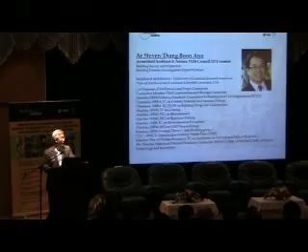We also have Steven. Steven, like to stand. I'm introducing you to this because I know there could be a lot of questions and answers. So these are the people - I don't want to answer all the questions, so please feel free to bring up your questions later on.

Architect Al, who's based in Penang, would like to just stand up and show you. And we have our engineer, Casey, would like to stand. Casey. And we have engineer Kok Yi-Hing, which is our electrical engineer, and engineer Kok Yen Kwan as well.

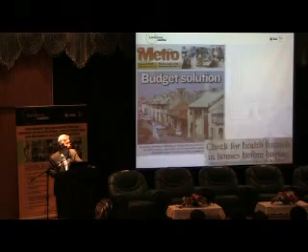Okay, now I'm just going to run through some of the stuff that we are all very concerned about - our properties. Because ownership of your property is probably the biggest and single most expensive thing that you ever buy in your lives or own.

So asset protection and asset ownership is something very important to our community. So how do you protect it? Most of us spend more money on our cars and our bodies, but very little money and effort maintaining our buildings. This is something that I believe generational changes and mindsets are beginning to come in.

So we begin to try and reach out as much as possible to how home inspections and property inspections can be made available to you all.

Now, I'm sure most of you, as what the Dato' YDP has mentioned, we sent out 349 letters, something in this order - this is probably the reminder letter. Okay, now, so building owners, not only you in MPPP have received this letter.

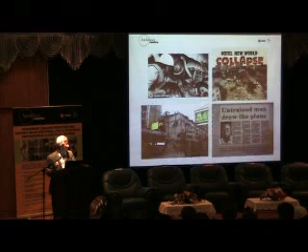So that's why the building collapsed. But that's very sensational. The bottom left is in Hong Kong, and you know, recently you heard of a building collapse in Hong Kong as well.

Now in Hong Kong they have other issues which I believe you are also not immune to, which is falling windows, especially in freak winds or even strong wind conditions. Older buildings or even newer buildings are suffering. They call it two types of aspects. One is mechanical falling out, meaning the screws and all that rust and then they fall out.

And falling windows are not fun. If your car is below or somebody is below, it's really not fun to be standing anywhere near a falling window or a falling breaking glass.

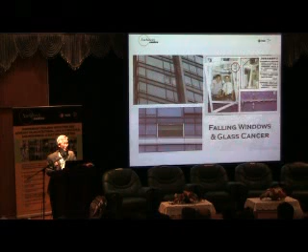The other one is, of course, excuse me, you guys look a bit serious. Can you guys maybe smile a little bit? I know this is a serious topic. It's hard to be up here with so many serious faces.

Okay, thank you. Now, this glass cancer. What is glass cancer? Glass cancer is happening a lot worldwide, where glass for curtain wall buildings like you see here just suddenly breaks. It's due to the impurity in the glass.

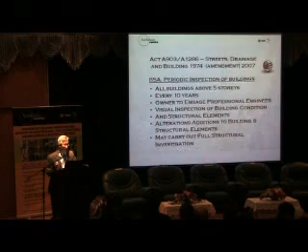So these are the kind of issues that has led Hong Kong to even do mandatory window inspections. But over here, back in Penang and Malaysia, we are basing our inspections currently on Act 95A. Now let me tell you what this Act says.

I won't go through the first two because I think it's been said. But the important one is line number 4, which is visual inspection of building condition. It seems like a simple word, but it's a big word because building condition means the entire health of the building, and structural elements.

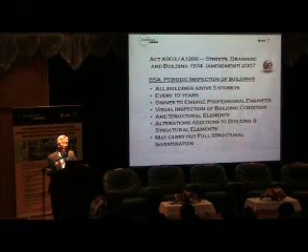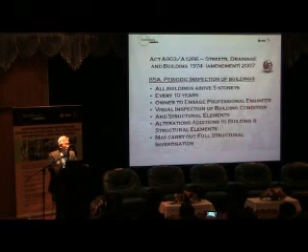Now, structural elements means - like if you are in your body, if you are above 50 years old and you go to a doctor and you choose to go to an orthopedic surgeon because you say, look, I need a checkup, doctor, I think I need to check my health, and you go and check yourself into an orthopedic specialist. Do you think that's a good idea? That's not a good idea, because he can't even look at your bones without an x-ray.

So there's a lot more issues with the health of a building. Pretty much like a human, you got your heart, you got your blood, and you got your brain. There's a lot of things in there that can go wrong with aging. So similar to buildings, do not look into the wrong aspect. You have to look at the holistic situation.

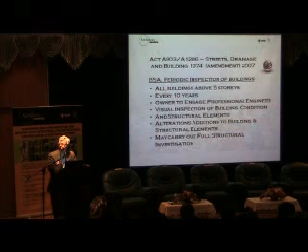Also, the Act requires - over time, we expect buildings to have been altered or added with parts. You can include signages, include extensions. A lot of people like to cover up their balconies with windows and glass. I see some people looking away. Now, some of these alterations of window and glass have got a history of falling out, and a lot of them are illegal. As a result, most of this needs to be inspected as well.

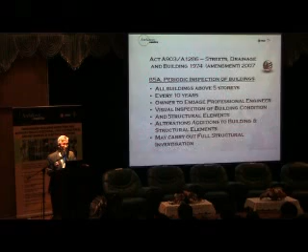Now, the repercussions of it, I have to leave to the policymakers here upon the completion of some of these reports. Now, on finding out issues that happen on the first inspection, the Act also allows for full structural investigations, which is part 2. We're not looking into part 2 in this seminar. We're looking really into part 1 of this inspection, the first visual inspection.

Now, in Hong Kong, the basis of how they have arrived at the mandatory inspections, they've come up with a code of practice. You can look this up, you can Google this - just Google for the building inspections of Hong Kong, where they have a long-standing problem of building neglect and to ensure safety in the long run.

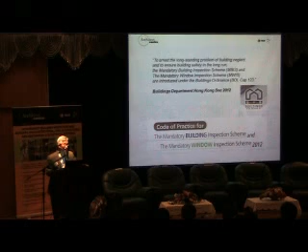Now this is as late as December 2012. This is not something that they have done years ago - they tried to do it years ago, but similarly, they ran into implementation problems. This is Hong Kong, and today, December 2012, only several months ago, they have launched this officially. So you guys are just there, getting things in the framework so that things can be done properly.

In Singapore, this is from the BCA Singapore, equivalent to our CIDB in Malaysia. They have an inspection scheme called SAFE, Structure Safe Building, which is under the periodic structural inspection. Here, they also have very comprehensive ways in which you are tasked and given notice to do the safety inspections in your property.

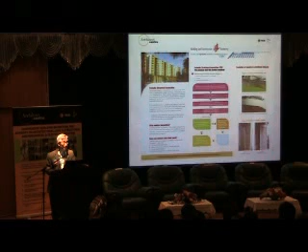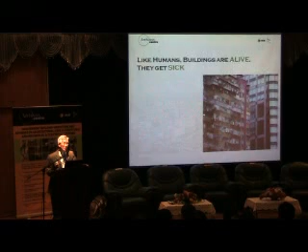Like I said, buildings, like humans, they are alive and they get sick. One of the biggest attributes to this is lack of proper maintenance, usually due to ignorance, funding or apathy, building neglect, wear and tear, and mostly to do with end of life cycle.

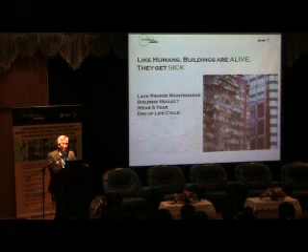What is end of life cycle? Everybody knows every 50,000 kilometers you change the tires in your car, right? Every 10,000 kilometers you change the oil. We all know that. But buildings wear out too, and things are not meant to last forever. So there are some parts of the building that reach the end of life cycle, like pumps, for example. Pumps are not meant to run for years and years. You need to change them.

And if some of these pumps are not changed, in the event there's a fire, when you try to put on your fire pumps, you find that the pumps are not working. So you end up having a fire trap, and buildings getting burned before the bomba comes.

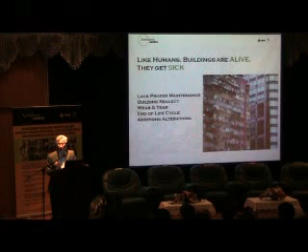Of course, additions and alterations. You can see from these photographs that many of these balconies have been covered up, and they all have potential. In Singapore, those things sticking out from the windows are called killer litter, and it's a jailable offense if something's dropped down and you hit somebody.

Abuse and misuse. Okay, so now, let me take you a step further about buildings, how the buildings that you live in, and you work in, and you play in.

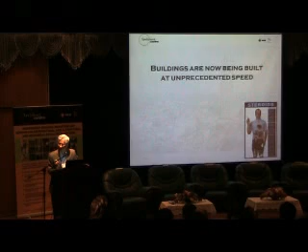Today, I see properties being built at unprecedented speeds, faster than any time that I have known. I've done a lot of buildings, my hair, you can see from my hair.

Now today, developers make money because they want to work fast. And every contractor that tenders a job, if they were to tender anything more than 18 months or 24 months, they don't get the job. But really, it's true. So buildings are now built like steroids. And if you build your buildings on steroids, what happens? They are born sick. They are.

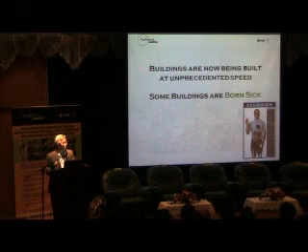Because it still takes 9 months to make a baby. Ask Prince Andrew about that. If the baby comes out two months early, if the baby comes out too early, it's a premature baby. You've got problems. You've got to nurse that baby back to health.

So today we see a lot of new buildings that come to Architect Centre that are born sick, that never got it right in the first place. And you inherit these problems, and the problems compound and compound. And 10 years later you go, oh, you mean we didn't have a pump all this while? This is what we are seeing in buildings, not only in Penang, but in KL as well.

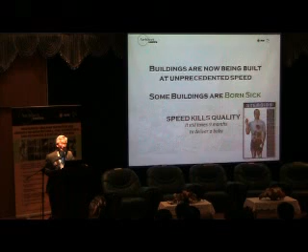So speed kills quality. So we have to be very mindful of that. Maybe from now on we have to allow shorter working hours. We have to only work in the mornings, and then afternoon, no working hours. And definitely no extra time.

Now the other aspect, and I think you all know, everybody's been to a doctor, is you get a doctor telling you you've got cancer, you're going to die. He says rubbish, incorrect diagnosis. Or maybe you got cancer, he says you got no cancer.

Now it takes a very skilled professional to see the difference between a crack that is cosmetic or serious. When you look at the crack, every crack to a layperson is serious, right, when you see a crack in a building, especially around the car parks and the building structure. But from our experience, 90% of cracks are not serious.

But what happens if your building has the 10% of cracks that are serious? Or the cracks that are not serious are diagnosed as serious and you spend thousands of dollars to repair and you waste your money. So this is the dilemma you face: is it a minor or costly defect, or is it safe? Look at some of these photographs here.

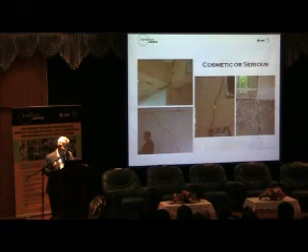This photograph was a school that was built in KL that has been abandoned. It's been totally declared unsafe.

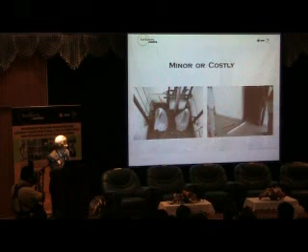A minor or costly defect. Look at the picture on the right here. It seems so trivial. That's the lift door, and that's just to check the level. Now what happens here? Very common - the tiler installs the tile sloping inside the lift, and water goes inside the lift. It's such a small problem, but you know how costly this is?

And if this was a bomba lift or a fire lift, you're in trouble. You got a death trap just because somebody messed up the tiling. You could be walking on this lift lobby all your life, stayed in this building for 10 years, and you didn't know that this small problem can be such a costly problem.

And here we see a lot of this. The doors of apartments, which are meant to be 1-hour fire doors, with hinges that are popping out. And this is a new building, a brand new building. And you got the fire door latch, the catch there, is stuck. Now what happens? The fire door is meant to be kept closed all the time in the building, so in the event you got a fire, it blocks the fire from moving into another space.

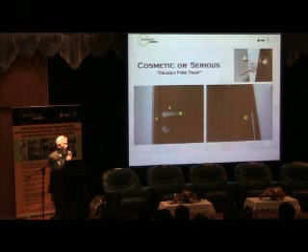So most of the time you find fire doors in the fire staircase. Now if your fire staircase has got one of these doors that don't close because of this little thing, in the event there's a fire, say on level 4, and you live on level 10, and you come down the staircase in an emergency, you get trapped because the fire will go into the level 4 through this door, and you get trapped there. So this little small thing has got amazing consequences.

A small picture like this - we are really scared when we see pictures like this, because the biggest source of fire in buildings is from the electrical riser. The riser, for those who live in apartments, is the doors that you find near the lift lobby where you've got all the electrical meters and the main power going up. And these doors are meant to be 2-hour fire rated doors.

Now we see so many properties that don't even comply to the bomba guidelines of putting in door closers. So you see this door, it cannot be closed. And this door here, it cannot be closed - it can't close by itself. So in the event there's a fire in here, and if your unit is just beside that, you are trapped in your own apartment, okay?

So you learned it from here. It requires a team effort, okay? It's not just one person - I can't do this alone. I have many pairs of eyes to go around and pick up issues like this.

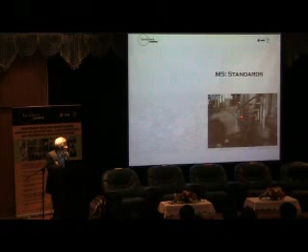We get this - you see, this is a very good example of settlement in buildings. Look at here - this was the original height of the building at the shop house here. After about 10 years, the pavement has settled down. Can you see that? So they start to add all this here.

So owner A uses a flexible pipe from the hardware shop - this one probably changed it earlier already. He uses, I think that's a HDPE pipe. Another one decides to use a flexible hose from his toilet bowl to connect that. And this unit here, he gave up.

So this building has settled approximately 400 millimeters. That's so much.

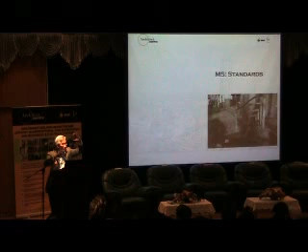I'm sure in Penang you have the same problems. Now this may be easy to fix because you can see this. But a building like this, what about the pipes that carry away what you flush from the toilet? Those will also break, right? So where does the water go? Where does all your sewage and urine go when your building has settled like this? The pipes would have broken, so a lot of that sewage water is now found in the subsoil under the building.

So these are the problems you may see if there's a bigger implication, and that will fundamentally affect the structure of the building. In the long term, it will affect the health and safety of the environment. Well, this one everybody knows.

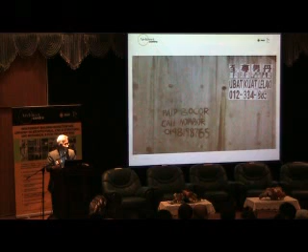So, Architect Center inspection reports. We are happy to share with anybody in the industry. We are not exclusive, we are inclusive. I share this information with all the people who attend our trainings all over Malaysia. I've been to Penang three times and had wonderful responses. These are the three steps that you should emulate in any building inspection, whether it involves structure, architecture, roofing, mechanical, electrical, and so forth.

It's okay, you guys don't need to write all this down. We'll make the slides available from NPPT, you can always get it from them. So just give me full attention, and then the recommendations for how we go about doing this.

A lot of people are concerned about cost too. How do we go about doing inspections? You've probably heard horror stories, like people going to hospitals for a medical checkup and the doctor asks them to do 101 blood tests, urine tests, check this marker, check that, right? It's just so that you spend a lot more money. You come up with all these results you don't understand, and then he gives you a couple of pills and you go away. So that's really overcharging you for work that you don't need.

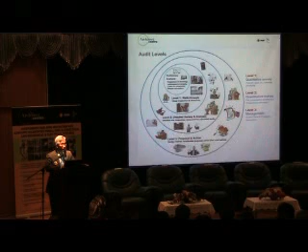Now we are. You can ask all your questions today. Only from the findings of level 1 will we be able to implement more detailed investigations. There's no point hacking up walls and things like that when you don't know what's wrong. It's no use going to level 2 until you've done level 1. And level 3, of course, is the implementation, if you've found issues and want to address them with the appropriate remedy.

So for level 1 inspection, let me go through in detail slightly, it won't take very long, just a few slides. The first one we call a holistic qualitative check, on the wellness and health of your building. It's a visual walkthrough by a team of experts, some of whom you see here. We don't encourage the use of assistants or technicians; it's imperative that inspections must be done by the particular qualified person himself. Years and years of experience are required to do a visual inspection. The team will comprise an architect, engineer, C&S, and M&E, and simple instrumentation will be used.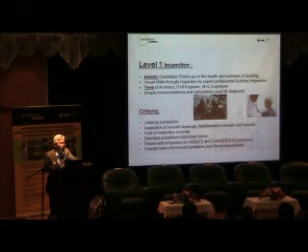The criteria is to listen to your complaints. When we go to a condominium, JMB or strata property, the most important thing is to listen to the problems you face. I got leaks here, I got cracks here, I got this leak that cannot be fixed, I got this electrical wire that keeps tripping. What do you do? I've got contractors quoting us an arm and a leg.

Inspections of your drawings and maintenance manuals and records. This is a problem because most buildings I've been to, I ask where are your drawings, and they say we got drawings. Then I go to the storeroom and open it up, and it's all eaten up by moth and termites and in pieces.

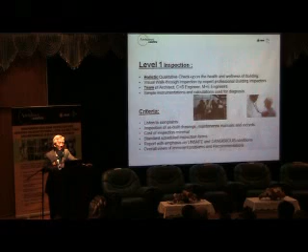Unfortunately this is a problem in Malaysia. So it's important that if you own buildings that are fairly new, preserve these drawings. Invest your money in digitizing them, putting it on a CD, and keep it in safe hands.

The criteria is to keep the cost of inspection minimal. So therefore the standards of reporting has to be kept in a schedule, with emphasis on unsafe and dangerous conditions, and of course the recommendations.

So we will look into 3 elements: structural elements, architectural elements, and M&E elements. I'm going to speak a little bit about the second and the third one.

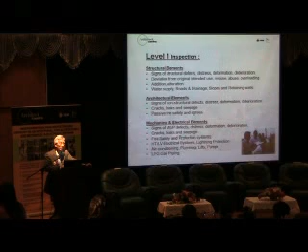The architectural elements is really looking for signs of non-structural defects, distress and deformation. Falling wall plaster is not funny as well; you don't want to be around that. We've seen 2 or 3 projects in Penang with falling plaster, and we're not talking about thin wall plastering, we're talking about thick wall plastering. When they come down, they smash your car.

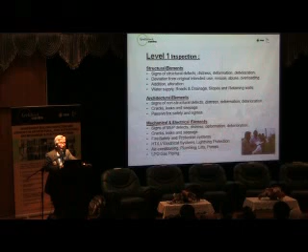And passive fire safety and egress, and M&E. This is something we sometimes tend to look away from, but these are what we call the big ticket items. They are expensive, and if you don't maintain them or replace them or plan for the replacement, you're going to be in trouble. So MEP means mechanical, electrical, and plumbing.

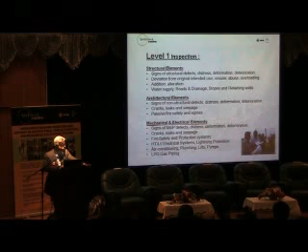Cracks, leaks, and seepages. Fire safety. HT means high tension, and LV means low power. Air conditioning and LPG gas piping—I'll tell you why in a moment.

Level 2 inspections is the follow-up of the level 1 report. That means if we find some issues with your building, we will make recommendations to be implemented in level 2. Here we will do a slightly more detailed survey and analysis, advanced instrumentation, and also detailed calculations used for the diagnosis.

Now the reports here are not standard reports, they are tailored reports. That means you may have a team of 3 people coming to your property, but on level 2 you may only have 1. So if you have an issue with, say, fire issues, then only the fire engineer will go and prepare his portion of the report for you to implement those issues.

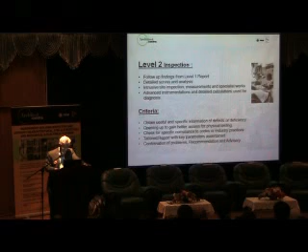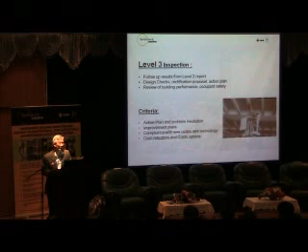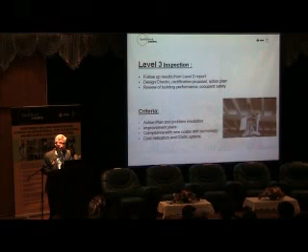Most of the time what I see is managing agents and property owners take the proactive role, getting quotations from a waterproofing guy who says, 'I give you 10-year warranty, no problem.' Then after they spend the money, all the problems come in. Then they start blaming—oh, your structure is cracking, your roof got this, your roof got that, somebody went and damaged this. So don't go to the surgeon and get your operation done until you've contacted the building physician. Get the correct diagnosis first before you go out and do the level 3 implementations.

Now I know there are a lot of lay people here, so consultant engineers please bear with me. It's important that we explain to the general public what is Building Structure 101—101 meaning Chapter 1. Just a few slides: everybody knows that a building structure is not just what you see.

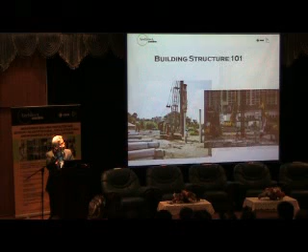So if your piling has been put into the ground, do you think that a structural engineer with good X-ray eyes can go in there and check the condition of the piling? No, nobody can do that. It can be done, but it's very, very expensive. So certain things, even though you get a structural engineer to check, he cannot check the piling. Nobody can.

Second is the structure, the building structure, what you see. Like even just across here, this building under construction. Concrete is always built with steel and concrete together. In Malaysia, main structures are RC frame, reinforced concrete frame, most of the buildings. The design of the consultant engineer is to design the dead load and the imposed live loads of the building. Now if you change any of this dead load, say you suddenly increase the number of floors, obviously something's going to happen, something's going to fail. And if the imposed live load was designed for a certain number of people and things, and suddenly you change it and put a library with lots of books, using it as a heavy storeroom, you're going to get structural problems as well.

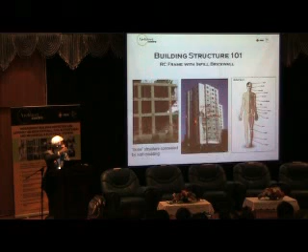Now, in Malaysia, after the concrete frame has been built, they fill it up with bricks inside, so they put the bricks and windows on the inside. This graphic is like an X-ray, done so you can see inside. But in reality, you can't see the structure of the building. It's hidden behind the plastering. So when a structural engineer comes and checks your building, what do you think he's going to be able to check? He cannot check all the steel inside, he cannot check the concrete because it's all hidden. Just like the human body, you cannot check the bone directly. You can X-ray with the technology for human X-rays, but building X-rays are very expensive and very limited. They have huge limitations. So the limitations of just doing structural inspections will give you a false sense of safety. You need to look into inspecting the building as a whole.

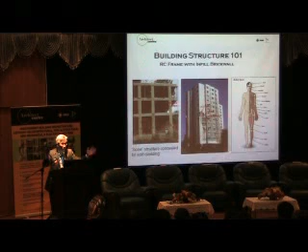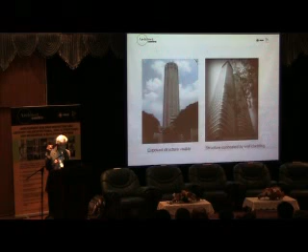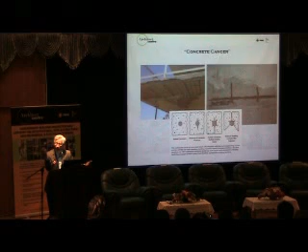So one of the biggest concerns that architects and engineers experience with concrete in Malaysia is known as concrete cancer. Even buildings get cancer. Once you get cancer in this, you've got to cut it out and fix it at a very great cost. Now what causes concrete cancer? First of all, the building was born sick. And then water starts to get into the cracks in the concrete. You know in Penang it's very high humidity, this is the tropics. Moisture gets into the steel, it starts to rust, and then it starts to pop out the concrete. So constructions like this are difficult to repair and expensive to repair.

Okay, there are more photographs of concrete cancer here.

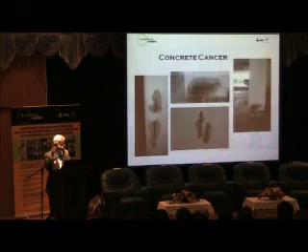So, Kisah Benar - I have in my trainings a whole Kisah Benar lecture series. We only do all the Kisah Benar, building failures. We also have one on hantu, when we go in there and inspect buildings that are haunted. But that's a separate one, only for special request.

More Kisah Benar - these are slopes here. So I will speak a little bit about slopes, because Penang, being an island, has a lot of slopes.

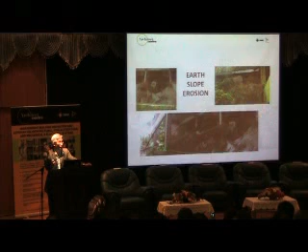Earth slope erosion is something that has got very little to do with structure, but a lot to do with maintenance and water. Every time it rains, water finds its way and forms little gullies, little trenches, and it's not going to the right place. A little bit of water in the wrong place, a little bit of grass, and soon you get failures.

This is a photo of Bukit Setiawangsa in KL, taken in 2012, not very long ago. So I'm not bringing in archive photos, these are actual photographs. Now the underlying issue here is not only the slope design and maintenance, but actually who takes ownership of the slopes.

This morning when I was having breakfast, my Grand President was alerting me to highlight this point about ownership of slopes. Along Tanjung Tokong, Tanjung Bunga, I have inspected several properties built on slopes at the back. You have a lot of slopes that are part of the property. Then I asked the owner, where is your boundary? Can you show me where is your fence? They say up on the slope, halfway. Right? Halfway on the slope.

Then I said, has anybody gone up there? The managing agent said, scared. How can I go up there? I'm going to die, you know. I said, yeah, exactly. If you can't get up there, how do you expect anybody to get up there to maintain the slope? But you own that slope.

Now suddenly MPPP gets an application to do development on top of the slope. What happens? This is actually happening because with the scarcity of land, slopes are going to be the next target for developers to start development. And developers are very innovative, they will find ways to build on it. Are there developers here? Yeah, I'm sure you guys are.

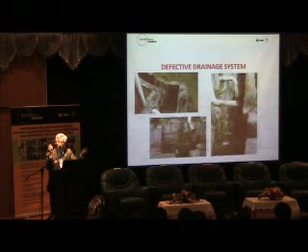Defective drainage systems, again nothing to do with structure. This is to do with the pipes that carry all the sewage. Again, defective. This is clearly a sewage treatment plant that has met the end of its life cycle two or three times.

On the left there, can you see this here? If you plant something there, it will grow really well.

Another very interesting complication is mixed strata properties. Again, innovative property developers and architects. Like the Nescafe 3-in-1, now you've got 4-in-1, 5-in-1, 6-in-1 — properties that combine a podium with hospitals, school, condominium, apartment, service apartment, hotel, everything in one. 6-in-1, 7-in-1, yeah.

Now these 6-in-1, 7-in-1 properties, if you happen to own one, it's very complicated, especially when it comes to building maintenance and management. Access is always an issue, and you inherit a whole host of unresolved defects because some of these buildings are so unprecedented — you can't even get to the window to clean it. And most of the time there are very little useful drawings and very unsafe conditions.

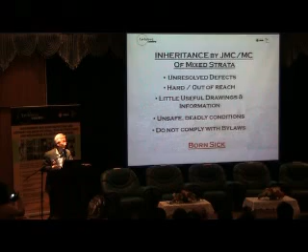So again, born sick. Now these photographs are taken in some of the properties — I hope it's not yours. It's not just generic photographs that we've taken. These are typical defects, 7 to 8 years old.

The law says after 10 years, but even buildings way before 10 years are already suffering from leaks of this nature. Now it may only be cosmetic.

You say, never mind, just put a coat of paint, or my contractor tells me I can get this special waterproofing paint, just paint on the wall and all your problems will be solved. You believe that? If he has a paint like this, he will be a billionaire. There's no such product that you can paint on the wall and all your problems will go away.

These problems can cause balcony walls to fall out, big slabs of balcony walls to come down. It's not nice, time bombs going on. We have in FIAPC a whole one-day seminar on the time bomb series. These are some of the slides I've used, where I've documented typical photographs showing the aging of buildings.

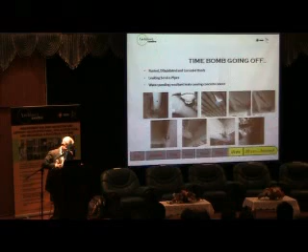Same building, different building, same age, one in Penang, one in Kuala Lumpur. The one on the left is in Penang, in Tanjung Tokong, well maintained, about 18 years old. Wonderful to see that. Whereas the same one in Kuala Lumpur is in that condition, very neglected. Incidentally, the one on the right had air conditioning falling out.

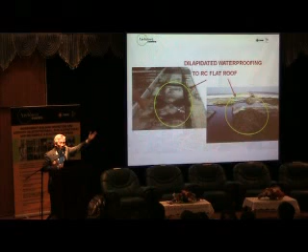This one, dilapidated waterproofing on RC flat roofs. Can I just have a show of hands? Who has roof waterproofing problems? Come on, show me your hands. Only one? So few? Okay, more coming up, I'm sure there's a lot more. You guys just didn't go up to the roof.

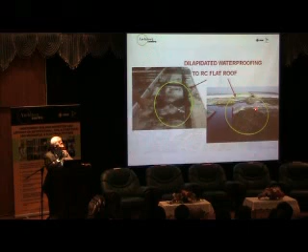These are properties that I have done. Look at this one here. It's not a swimming pool, that's not a planter box. That's actually the flat roof they've been trying to repair for about 2 years, and they can't get it right. All that heap there, that's the cement they put, but it's all sand. Don't laugh, this is actually happening all over.

Today the waterproofing warranty says only 5 years. So what happens after 5 years for waterproofing? You mean you have to spend money every 5 years to change waterproofing? Mati lah. But this is the reality, okay?

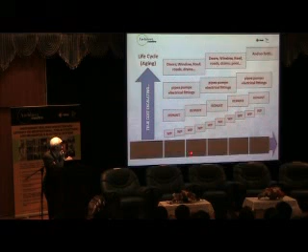Because of the aging of a building, if you look at this chart here, this is 10 years, 20 years, 30 years, 40 years, 50 years, the cost is going to start escalating. This WP means waterproofing, so every 5 years you're going to go and do your waterproofing. Before you can even get money for sinking fund, you're already having to do the second repair.

This is repainting, let's say every 10 years. You guys always want to look at repainting. Pipes and electrical trunking every maybe 18, 20 years. And then doors, windows, roofing, roads and drains, maybe every other 20-something years. So that's what you need to look at in the long term, the life cycle, to plan that.

It's not going to come down. I was speaking to one of the participants tonight, he says, look, the prices of things are really getting expensive here. But that's the same everywhere.

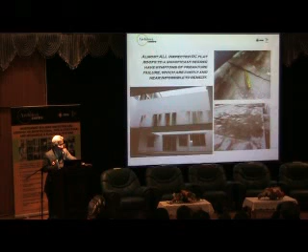Almost all inspected RC roofs, to a significant degree, have symptoms of premature failure, which are costly and near impossible to remedy. So when the roof on top leaks, this is what happened - all this stuff's come out on the side, oozing on the side. And after a while, this wall will also crack and fall down from whatever height the building is at.

This is one of my favorite photographs. This is architect Ao - he was helping us run a project here somewhere in Queens Bay. So those people around there are the residents, pretty much like you all. Are you all here, by the way? Anybody from this building? No? Okay, probably they all resigned from the JMB.

So anyway, here's a diagnosis: your sinking fund is sunk. Because of the condition of the roof here, it's going to cost them more than $1 million. They say, how much you got? 200,000. Where are you going to look for the money?

We are aware of the difficulties - even today I spoke to some who find it hard to even collect MC money, let alone putting in a sinking fund to do repairs. But this is the reality of the properties you have, and if you do not start addressing this, the value of your property will depreciate and people will start selling away. That's what you don't want, because you want your properties to appreciate, so put in the money - it's worth it to maintain your property.

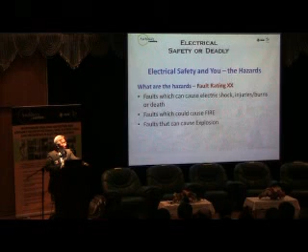Okay, now electrical safety. A lot of people do not realize this, but I'll put up some interesting statistics here. What do we look for in electrical safety? Not only faults that can give you electric shock or burn you or kill you, but faults that can cause fire and faults that can cause explosions.

Fire can be caused by electrical wiring - in fact, this is the single most common cause of building problems. The Suruhanjaya has very clear guidelines, regulations and codes that are very, very clear. So all our inspections are done in accordance with these compliances, and make sure that whoever you get to do your electrical wiring inspections are competent people.

Sorry, I have to show you some interesting statistics from the Suruhanjaya website - analysis of electrical accidents in Malaysia from 2002 to 2010.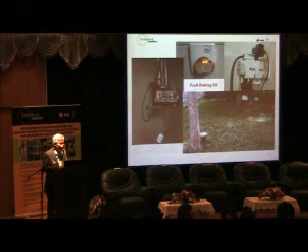Now these are some photographs we see all the time - you may take them for granted. This photo shows a little tool that checks whether the earth wiring is there - many times the earth isn't even connected. This one was taken during a training project we did, I believe from PISA, in a public building.

Here, sorry it's a bit dark - this is the switch room. Every building has an electrical switch room where the TNB supply comes in and then distributes to all the other switch rooms. So this room is full of electrical components. But what happens is there's a leak right on top of it, and when water comes down, it will blow up the whole electrical system. Repairing this kind of equipment can take months - maybe 3 to 6 months. So if it happens to your property, you could be without electricity for 3 to 6 months.

Infrared thermography - some properties in Penang have benefited from this, which I've come to do for you. Infrared cameras, like the ones that check you for SARS or fever at KLIA, we use similar but much more sophisticated equipment to check for leaks and electrical issues in buildings.

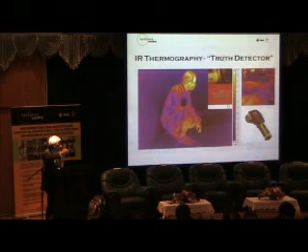If you look at this picture, that's a flat roof, and the spots there tell you there's water underneath the roof in that place - but you can't see it with your naked eye. So that tells you there are leaks underneath.

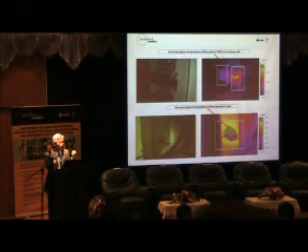Here, this is electrical work - when we use infrared, you can see that it's very hot. If you look at the temperature here, it's almost at flash-over point, meaning it's about to catch fire. We can diagnose this kind of thing very quickly using this technology. Same thing here - more electrical issues, and the green part there is getting very, very hot.

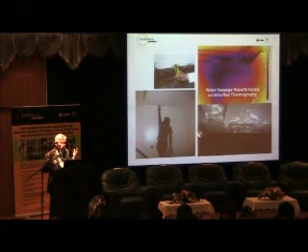We also use it for leaks. Traditionally I'd use this to check, but today I use infrared thermography - this is the beam where you can see water, but when checked with infrared you can see all the blue color areas, and that's not a ghost. That's the kind of technology now available to diagnose buildings very quickly. These are more infrared thermography examples - it can also check the exterior of buildings for cracks and leaks just by scanning.

Okay, this is about gas explosions. Do you all have LPG gas here in Penang? No, not yet - pipe gas. Pipe gas, okay, as opposed to LPG gas.

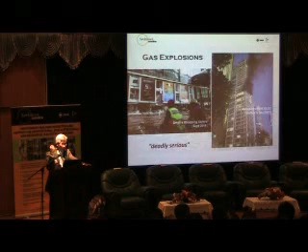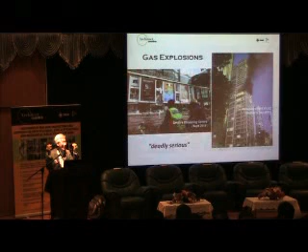Everybody knows about the Empire Shopping Gallery in Subang Jaya - that's where I used to live - which was caused by a gas explosion. This one on the right is Hampshire in KLCC, which happened on Mother's Day of 2001, around 7 p.m. A lot of residents in both this and the neighboring building were out for dinner, so luckily nobody died except one poor person in this unit, an expatriate who had just moved in 3 days earlier. He had complained about a gas smell in his apartment, and they came to fix it, but somehow they didn't get it right.

If you look at the gas explosion here - I investigated the building next to it - you can see it caused all the windows and even the handrail to be blown off. The handrail ended up on the other building, on the opposite side, about 60 meters away. I was on that building, the Hampshire Residences, 60 meters away. You can see the windows here, the whole frame has gone in, and basically all the glass found at Hampshire Park ended up at Hampshire Residences.

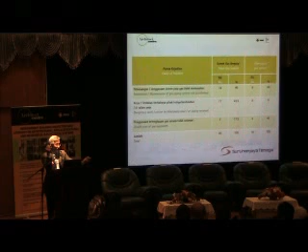Today, you can buy gas meters like this to put inside your kitchen to detect leaks. It's not expensive, about 60 to 70 ringgit. Something you can think about. So, punca kejadian of gas pipe problems—again, statistics from Suruhanjaya show a lot of problems with gas pipes. So gas inspection is also something that you need to consider.

Now, how I've put forward this schedule between level 1, level 2, and level 3 is in this flow chart. I'm not going to go through this because I believe we're going to ask MPT to form a committee so that we can work out, between all the stakeholders, the most appropriate way for us to implement these inspections.

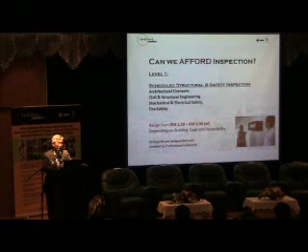Now, really, a lot of people here are saying, can we afford inspection? I have done many inspections here in Penang, in Kuala Lumpur, and various places in Southeast Asia. We believe the range for getting professionals to do the work is approximately 1.50 to 2 ringgit per square foot, depending on the type of building. Larger buildings can be cheaper, like shopping malls and things like that. But this is something we are encouraging you to prepare for and to accept the reality that your buildings are aging and you need this kind of comprehensive inspection.

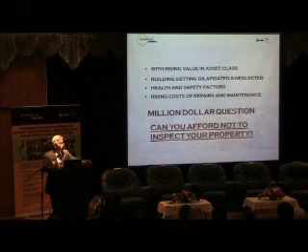Because with the rising value in asset class, buildings are getting dilapidated. So can you afford not to inspect your property? I'm going to put it to you—can you afford not to? Some people say, I'll just sell and move to another place. But when you sell your property, what can you buy with the money? You're going to get a smaller and smaller place, further and further away.

So if you live in a particular place, what's best is to maintain your properties. Put the money down and maintain it. A property that's maintained well fetches a better value than if you keep selling and moving, selling and moving. So, more regulations...

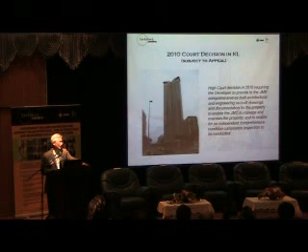I never agreed with more regulations, but in KL we had one case where the property developer refused to even give drawings to the property owner to do inspections. This building, they wanted to do inspections, but the developer refused—they said, no, we're not going to give you drawings. How are you going to maintain the building if you have no drawings? Even when you buy a simple handphone, they give you a manual on how to maintain it. Even a blender or a toaster, they tell you how to maintain it. But you buy a multi-million-dollar property, and there's no drawing.

So they went to court. Sad, right?

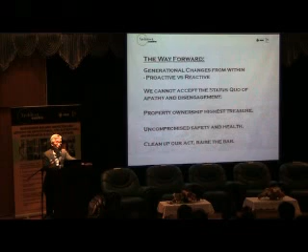So the way forward, what we see, what our dream and vision for you is—look, it's generational change. You need to change within yourself. Proactive versus reactive: don't wait for a building to fall before you start building walls. Now, you've got a platform to get it done. You've got all your politicians and council members here serving you. So decide what's best for yourself, and I think, do not accept the status quo.

So, that's it. I told you I'd do it in 45 minutes, right? So thank you very much.